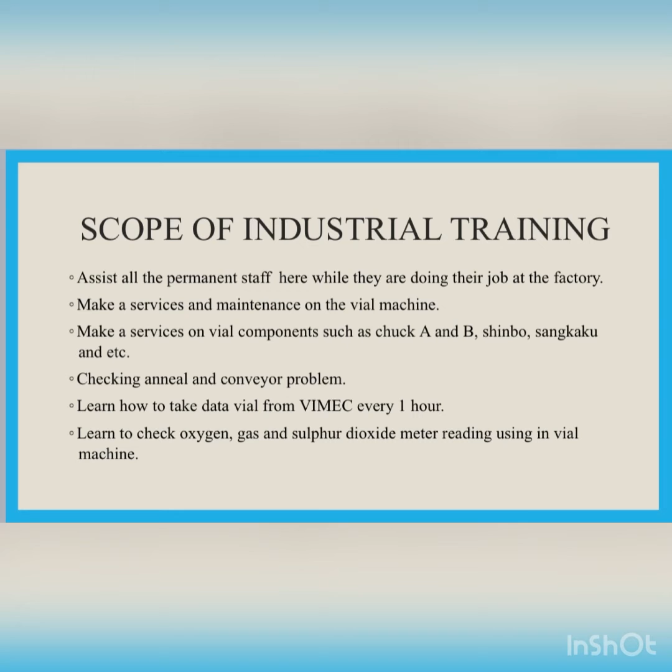Following with the company organisation chart, in this company we have 5 departments: QA, control, production, inspection, and administration. In QA, we have a QC leader and QC operator. In control, we have a warehouse leader and warehouse operator. In production, we have a production leader and production operator. In inspection, we have an inspection leader and inspection operator. And in admin, we have a general worker and security guard.

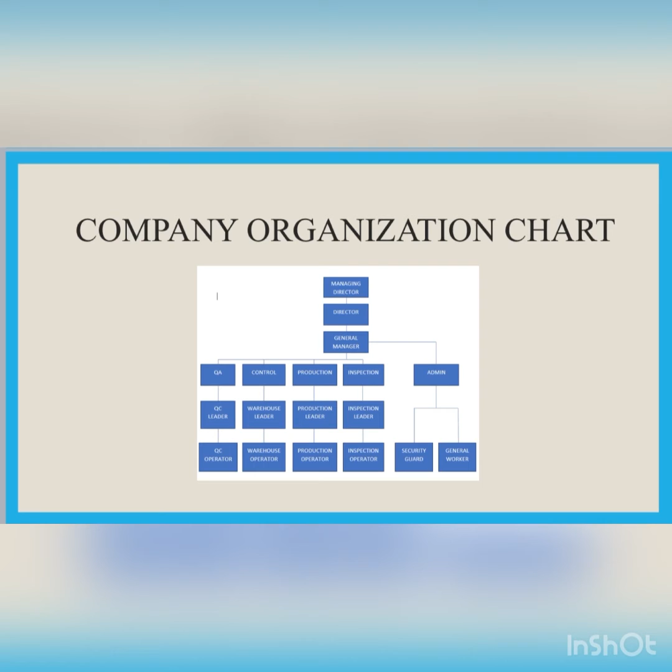So, I will jump to company product. A vial is a small glass or plastic vessel or bottle often used to store medication as liquid, powder or capsules. Vial-like glass containers date back to classical antiquity. Modern vials are often made of plastic such as polypropylene. There are different types of vials such as single-dose vial and multi-dose vial, often used for medication.

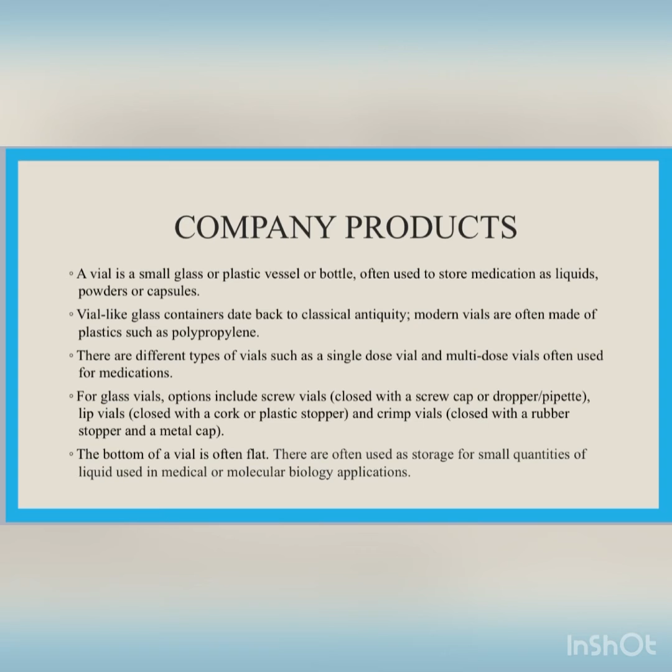For glass vials, options include screw vials closed with a screw cap or dropper pipette, lip vials closed with a cork or plastic stopper, and crimp vials closed with a rubber stopper and a metal cap. The bottom of the vial is often flat. They are often used as storage for small quantities of liquid used in medical or molecular biology applications.

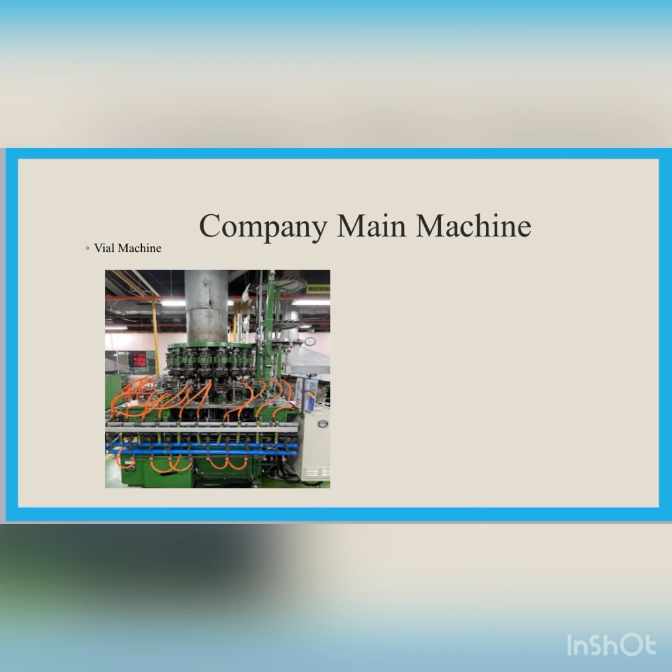I will share about the main machines of this company, which are the vial machine and VIMEC. As you can see, the picture shows the vial machine, and this is VIMEC. VIMEC is used to detect deformation from vials. VIMEC has gained great experience in regulating vials, ampoules, syringes, and cartridges at various stages of their manufacture. Most recently, VIMEC has been providing dedicated service for the inspection of vials used for the COVID-19 vaccine.

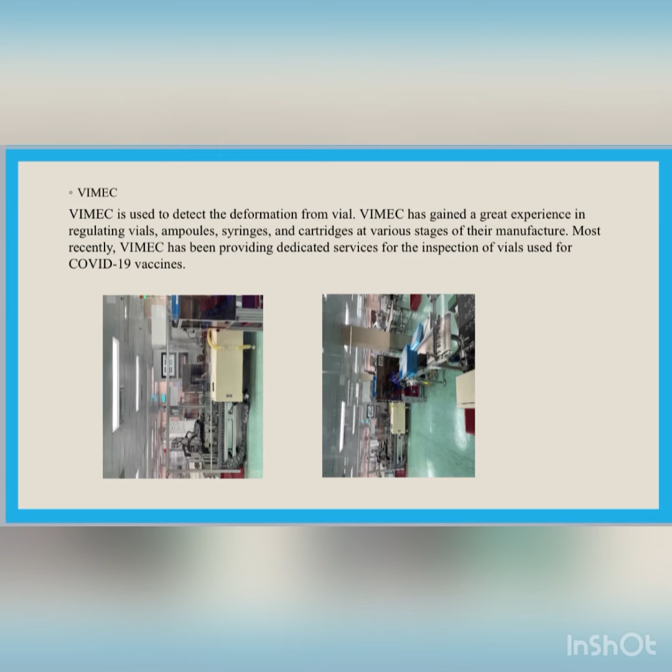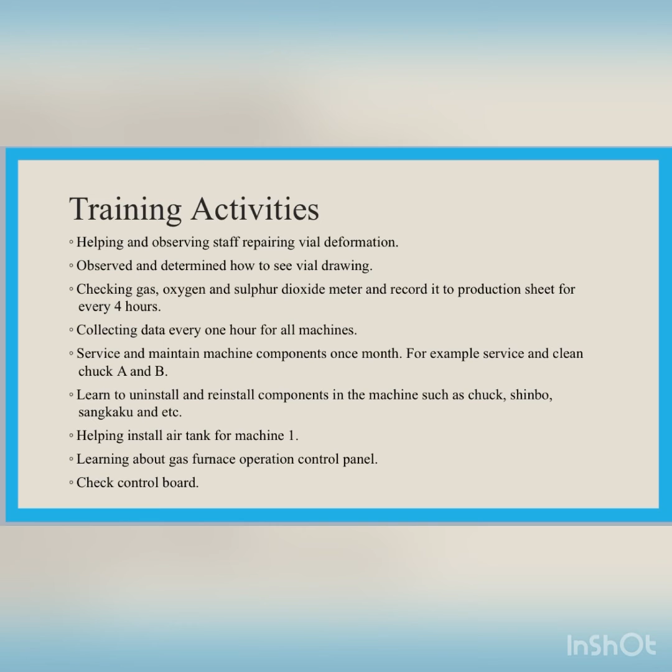I will share my experience during internship, which includes training activities: helping and observing staff repairing vial deformation, observing and determining how to read vial drawings, checking gas, oxygen and sulfur dioxide meters and recording them to the production sheet every 4 hours, collecting data every hour for all machines, servicing and maintaining machine components once a month - for example servicing and cleaning chuck A and B - learning to uninstall and reinstall components in the machines such as chuck, shinbo, sangkaku, etc., helping install the air tank for machine 1, and learning about the gas furnace operation control panel and checking the control board.

As the pictures show on the slide, I was doing measuring of vials following the specifications from the company. For your information, the vial machine can produce 18 bottles in a single rotation.

Next picture is the polished shinbo and sangkaku. Shinbo and sangkaku are important components to make the mouth and neck of the vial. It must be polished 2 times a week.

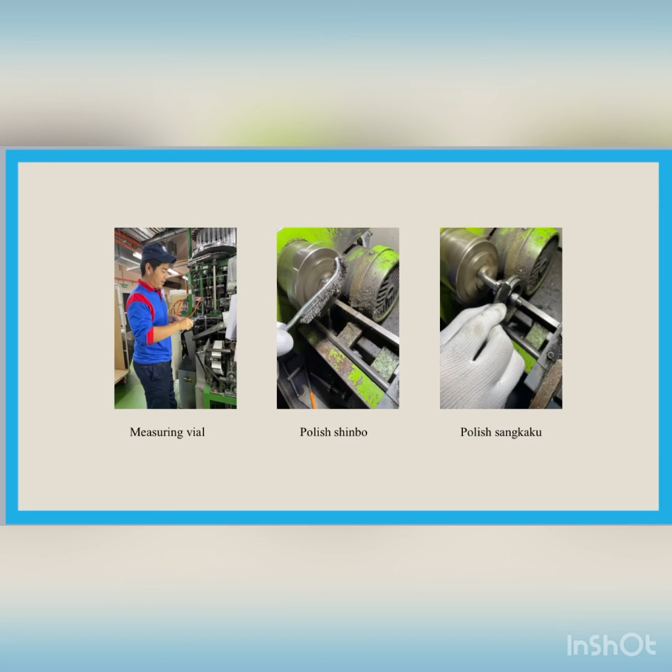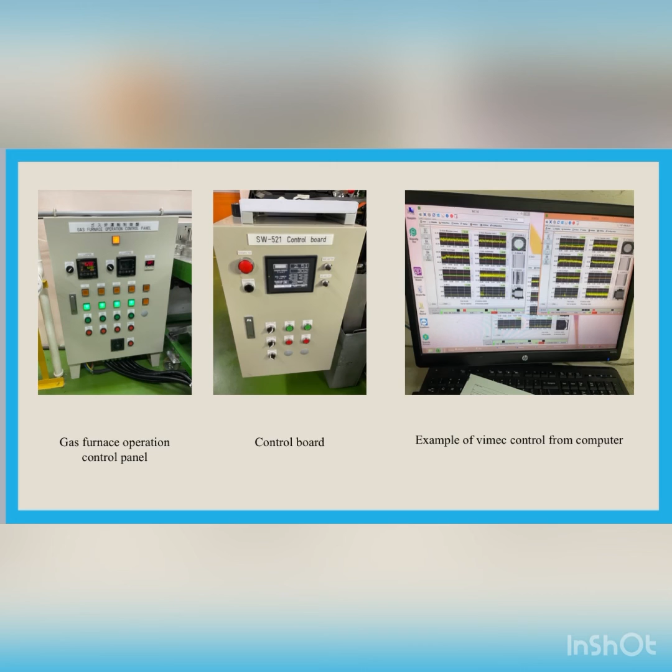This is an example of vimec control from the computer. Data can be obtained from vimec and the deformation of the product can be reviewed too.

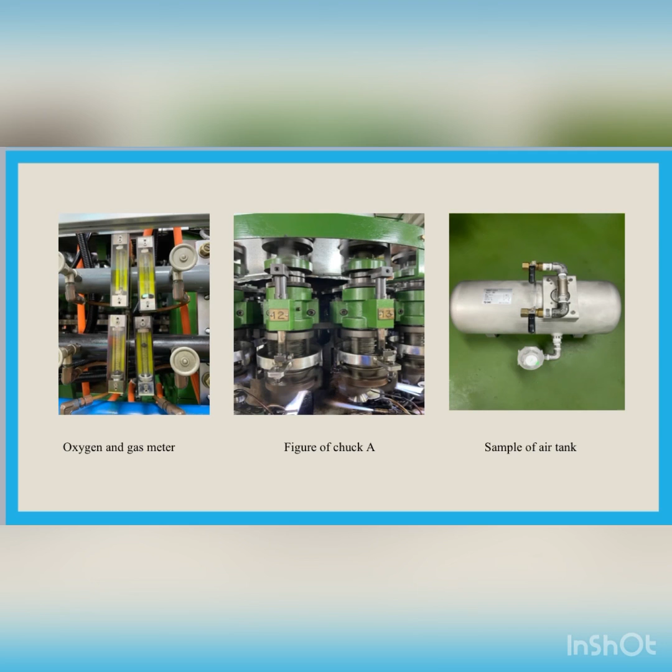In conclusion, based on my personal experience, I am confident that the industrial training program has accomplished its fundamental goal. All of this valuable experience and knowledge that I have gained were not only acquired through direct involvement in the tasks given, but also through other aspects of the training such as work observation, interaction with colleagues, superiors and other third parties related to the company.

There are many things that I've experienced and learned during the 6 months of my industrial training at Shiotani Glass Malaysia Sdn Bhd. For recommendation.

During my industrial training here, I was able to obtain a lot of engineering expertise. As a result, I recommend that students in the Faculty of Mechanical and Manufacturing Engineering and Technology do their internship at engineering firms since they provide much needed skills and new experience for technical engineering skill.

This internship will give benefits to students to use all the knowledge and theories related to the course taken during the study period. While students can also improve communication, build teamwork, and have good relationships with the staff of the workplace and industrial workers.